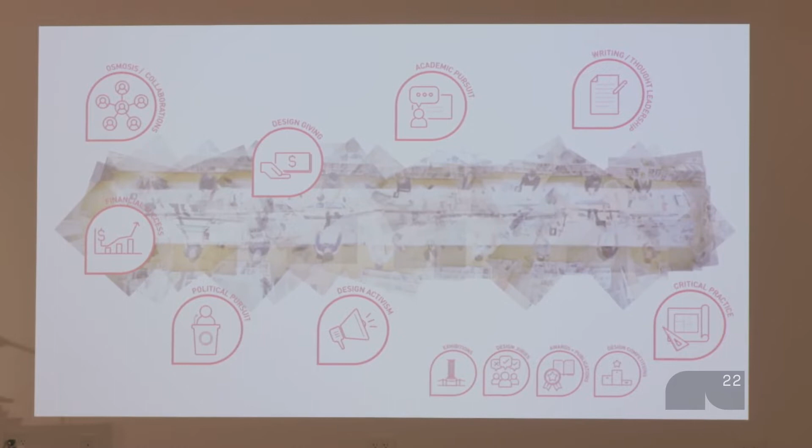So in the future, I think architecture has to become less of an image-driven art. I think architects and architecture have this task of becoming more strategic and more political, addressing the compounding inequality and social justice issues, so that we can build a better world for the 99% that we haven't really traditionally been addressing.

Architects and architecture, I think, have to do better using smart tools, advocate, create policy, get involved in politics so that the capacity of all people, communities, institutions, businesses, and systems within the community can survive, adapt, and thrive. So re-examining and rewriting the regulatory and fiscal policies should certainly go towards increasing affordability and equity for all.

That kind of is foundational to how we think. From the conception of the firm, we've been focusing on the missing middle, or mid-rise housing, trying to really be part of the lives of ordinary people going about their everyday lives. And we didn't choose it - it sort of came to us. Before we could shape it, it shaped us, so to speak.

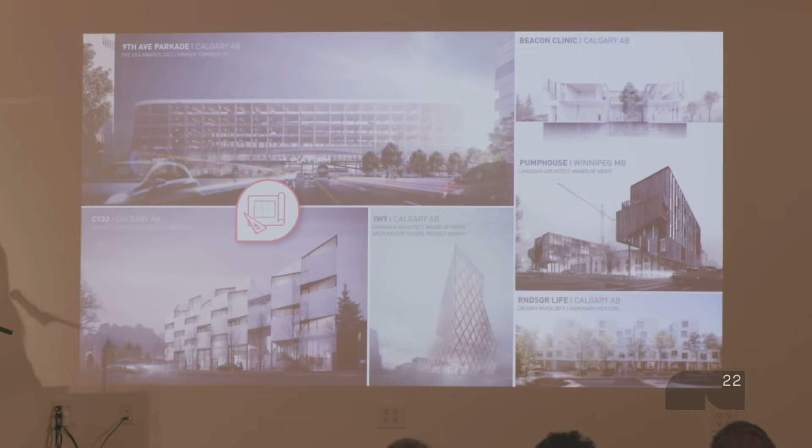There's been several efforts in that housing arena. When we started, we were very local - for the first 10 years, probably, we only practiced in Winnipeg. Then just recently, we've been expanding across the country from Calgary, Edmonton, Victoria, Saskatoon, Regina. You may not know where those are, but basically coast to coast.

Canada exists sort of 100 miles from the southern border, where 90%, even 95% of our population is. And then there's the far north, which of course is important, but is less architecturally shaped at this point.

And somehow, I guess, at the beginning of our firm, we were searching for that kind of conversation that was lacking, or the recognition that was lacking, that design actually does have a huge impact on what we're doing.

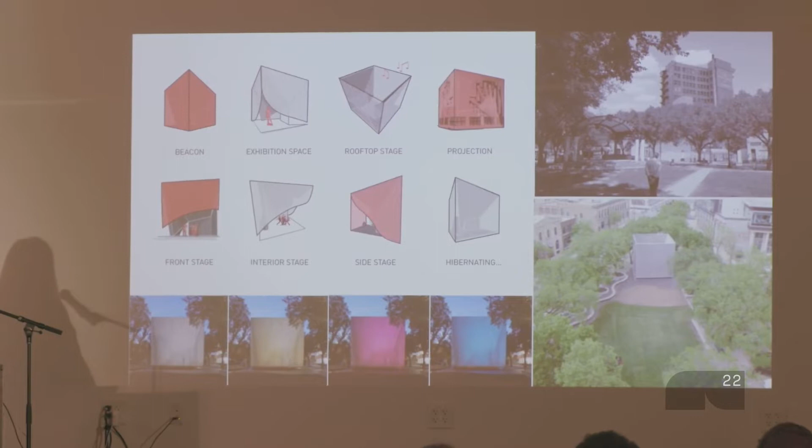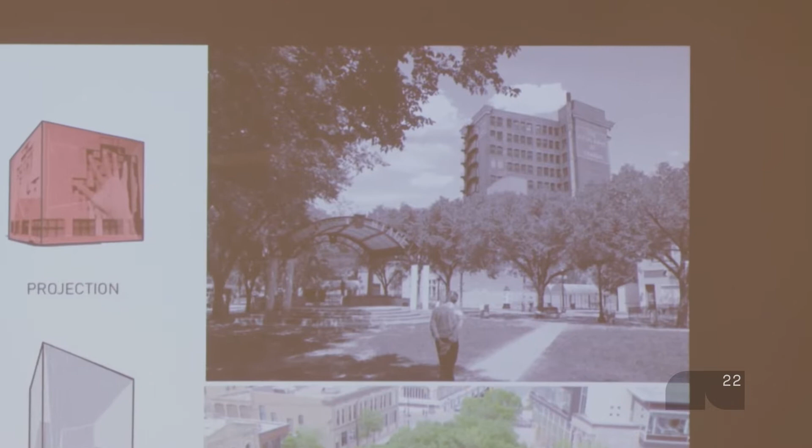From the 70s, we had to come up with a proposal for its kind of revitalization. The big idea for us was that it was empty for 321 days of the year. There were only about 44 events throughout the year, and when there's no event, it felt really sad and kind of empty and quiet. We were hoping to build something architecturally that would feel complete when there was no event.

So the idea of this shape, the primary shape of the cube, came from there, and then it immediately got traction and won the competition. The rest of the time we were really just working on how we would make it possible.

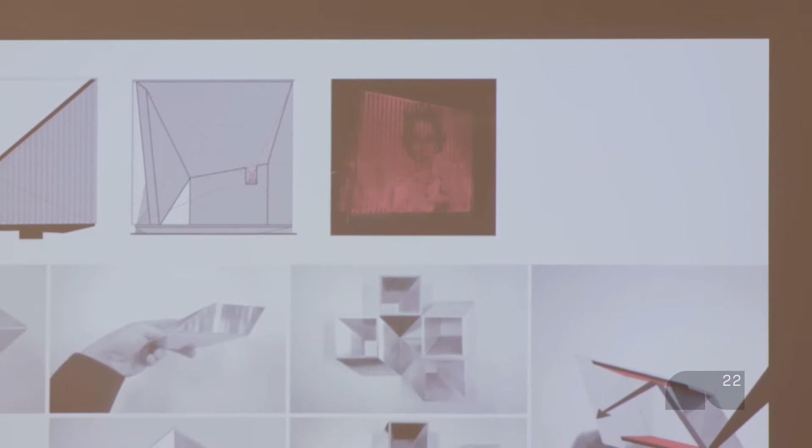The first ideas were about opening some slabs in it and opening it into a stage, then closing it up. But through vandalism and different things we had to consider, it sort of imploded instead. It's made out of 20,000 little aluminum pieces shaped like slices of salami, I guess, from an extruded piece of aluminum tube, woven together through stainless steel cable.

What was really interesting is that we discovered halfway through our process that if you project with a projector through Venetian blinds, essentially the picture gets transferred to the other side. I mean, who knew? I didn't know. So the funny thing is that you can actually put a projector inside of it and get a perfect image - a sort of poor man's version of an LED screen back in 2010.

Pre-pandemic, it now has 4 times the events, so almost 200 days of the year that it's actually busy. When it's hibernating, it still has music and can be programmed by artists with light and so on. So from that perspective, a really successful project and a popular place to take wedding photographs for some reason. The Winnipeg Jazz Festival has their event here every year, and the Fringe, our theater show, just ended this year.

But that's not the point. The point I'm showing you this project is the fact that it absolutely made people hate this thing. It was called the Cheese Grater. We got hate mail for it. There was a Facebook page that was set up just to tear down the cube.

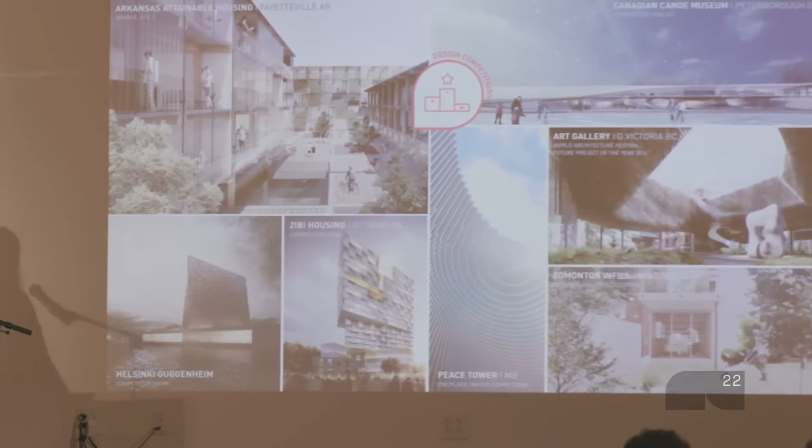So back to the ecosystem then. This is the competition - trying to measure yourself against things, housing competitions, different competitions. We usually don't have a lot of success, sometimes we do, but we try to do that every year. We set a budget aside so that we can do them, because we do think there should be a better competition culture in our city to also promote quality in architecture.

Publications and things like that - we've actually gotten clients this way. We had an article about a stupid thing in en Route magazine, which is Air Canada's national airline flight magazine, and got a call from a big developer as a result of it. We connected with another developer through Instagram, and these things are not only self-affirming or self-congratulatory, but they do result in opportunities that we can make a bigger difference in the future.

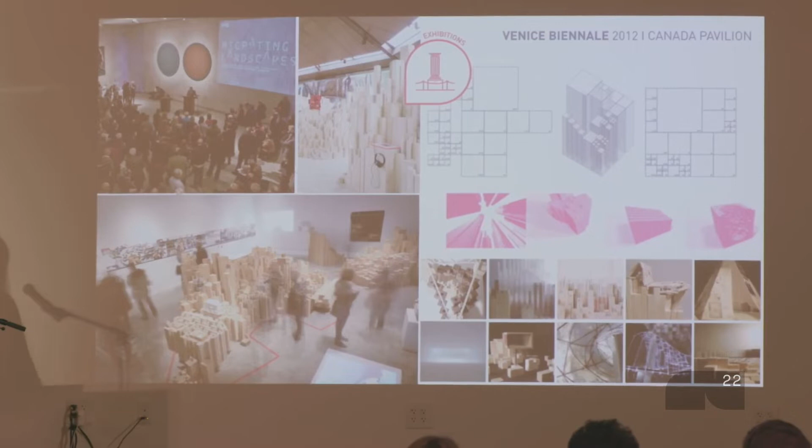Participate in juries and things like that, just to see what's out there and how we can do better. One of the major early efforts we did to try to create design culture in our city was turning Canada's representation in the 2012 Venice Biennale into a national competition.

So we got commissioned to do a project in Venice. Instead, we did 9 different events throughout Canada so that we could get better sponsorships for the event. It's not very well funded - there's a whole story to this. We were able to collect $650,000 for the project through touring it through Canada, and then created opportunity for 35 Canadian young practitioners to go to Venice to celebrate their projects there.

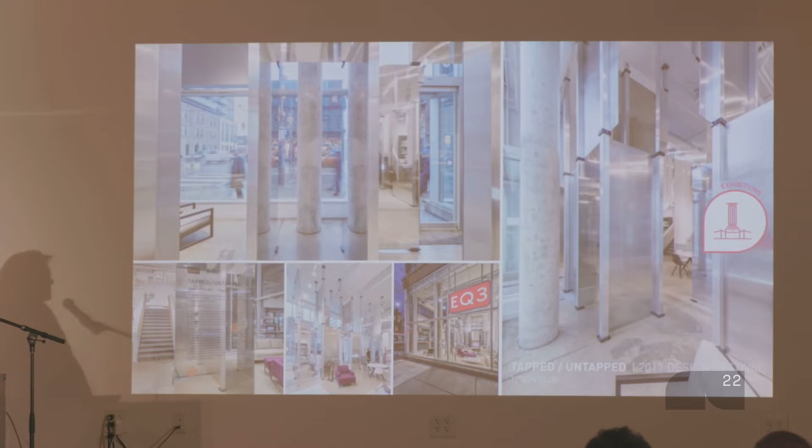There's also an exhibition as part of a design festival in Toronto, in partnership with a furniture store. We also do things like mayoral debates, or organize talks in our office called On the Board, where architects get together for a studio session with each other, withstanding critique from colleagues about doing better. The idea is raising the bar.

During our fringe festivals in architecture, on our frozen river, we helped initiate something called Warming Huts with a guy who actually runs it, named Peter Hargraves, but we were...

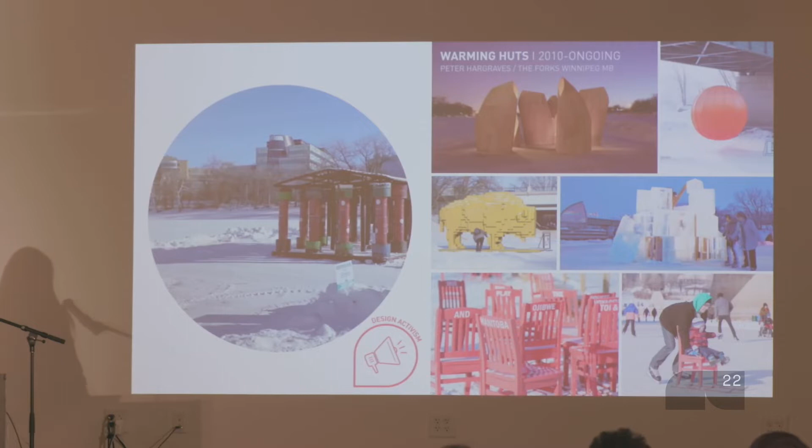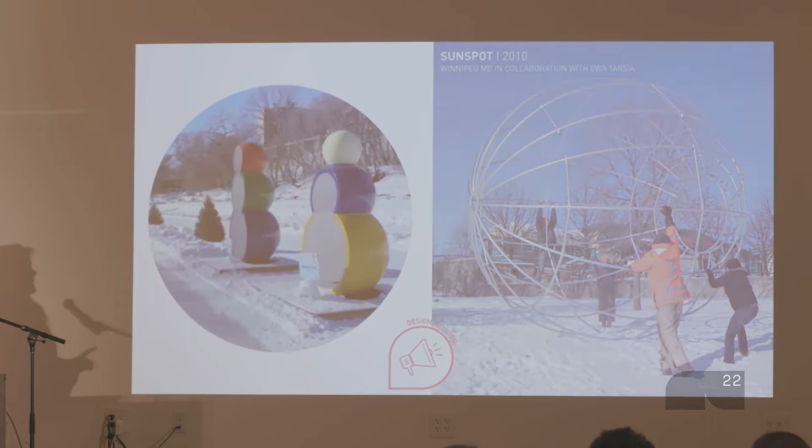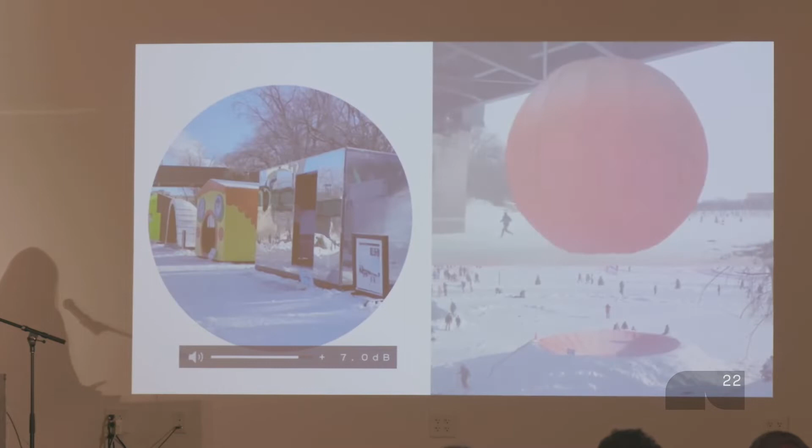Can I turn this down? Is there some way to turn the sound off? Okay, I'm sorry, I'm skating. Is there some way to turn it off? No? David, can you just dial the whole thing down? I don't have any others. We don't need the sound. What do you want to do? No, it doesn't do anything. Okay, I'll skip. I'll try to go fast. Sorry, I'm trying to get past this. So just look at the pictures. It doesn't move any faster, I apologize. Okay, I'm so embarrassed, I hope this stops soon. Last slide. Oh, sorry. Okay, I don't know what happened.

So that was Warming Huts. You can see there are little warming huts along our frozen river in the winter, January and February. It holds the Guinness World Record for the longest skating trail, about 12 kilometers, or 8 miles. You can skate on the frozen river. It's been a long time before Winnipeg really embraced its conditions, with people getting outside in minus 30, even minus 40 Fahrenheit weather. The point is you can always find a way for people to find joy in the everyday and take over those urban spaces.

Moving on, the next advocacy project: we were lucky enough to win the Prix de Rome for Canada, which gives you grant money to do a project. What we proposed was to have dinner and wine in 8 different design cities across the world, to find out how they perpetuate design culture, what builds it, who maintains it, where it comes from, what we can do, and how to bring those lessons back home.

We had a great time having dinner with key influencers in those cities through local connections, learning these lessons. It's amazing what people will tell you when they've had a little to drink and good food to eat. We wanted to play that off when we came back to Winnipeg after a year of different team members visiting different cities.

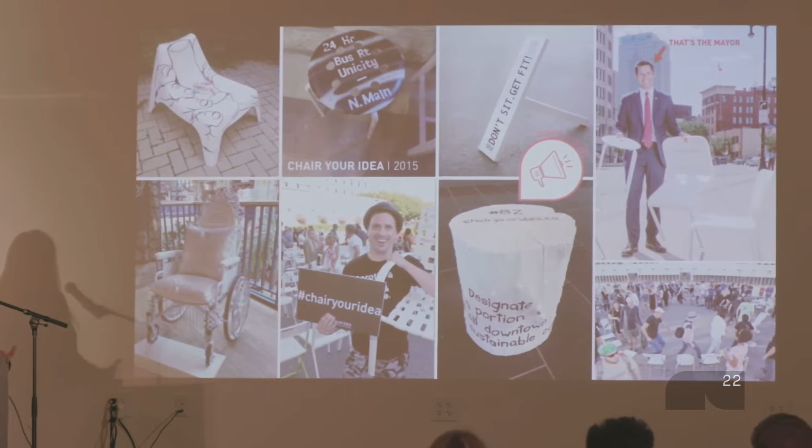This one was asking any Winnipegger, any regular folk, to have an idea, sort of an urban guerrilla idea that we could do for $30,000, and to write it in a format that would fit Twitter, which was 140 characters at the time. Then we would put a chair out in the public realm where that idea was written, so you could have a conversation with your neighbor about it, hopefully instigating the next idea.

At the end of that competition, with the funds we collected from entry fees, which was $25 each, we were able to have $30,000 to implement one idea. And the Winnipeg mayor, pictured there, got a book of 1,000 ideas that the city could consider doing in the future.

But also, this one is one of my favorites. I hope there's no sound in this... there's not, okay good. So the scale of change can also be incremental, achieved with small means.

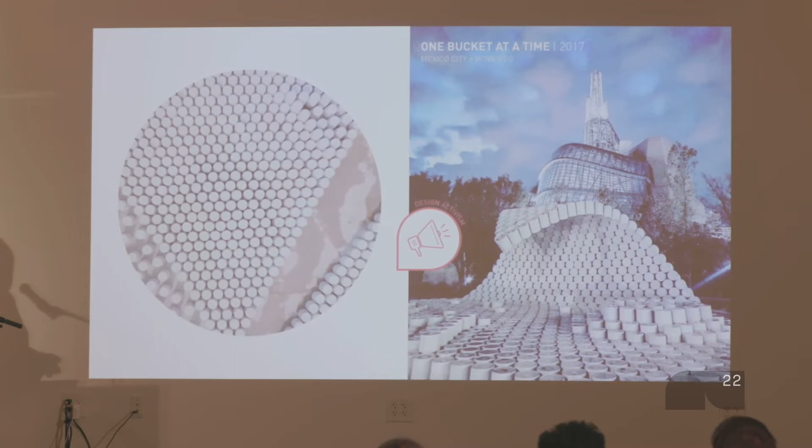This is a project called One Bucket at a Time, a collaboration with Factor Eficiencia from Mexico City, reclaiming public space back from the corrupt entrepreneurs of Mexico City called Viene Viene. The Viene Viene place ordinary painter's buckets in the public realm to create parking stalls where they don't exist, then charge money for the stall. It's sort of a corrupt operation.

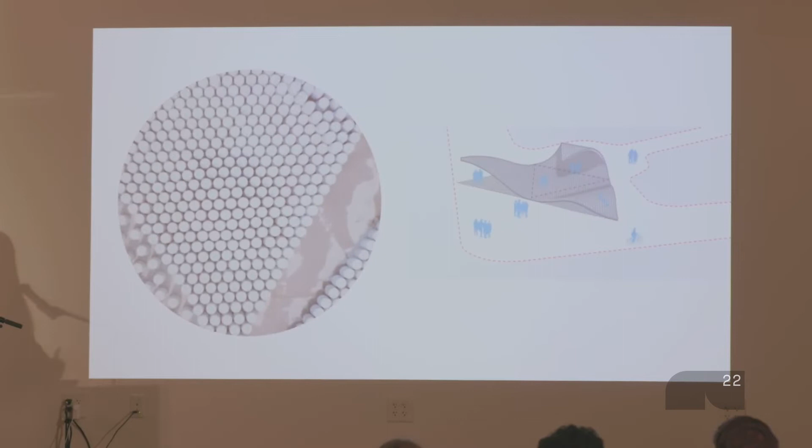The police are in on it. They get a cut.

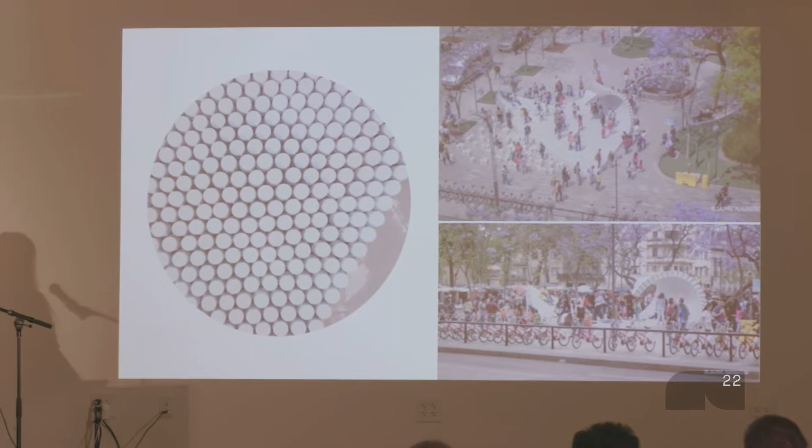Of course, it was a temporary installation. We were invited to go there to draw awareness of the issue, but it was super amazing to see this thing come to life in Mexico City. It was used really intensely for three days, playing on the idea that the painter's bucket was slightly tapered, so once you strung them together with ropes in the back, it created this cool little shape and wave you could almost surf on.

Once we released the buckets into the crowd afterward, they disappeared within a matter of hours. People would claim these buckets back into whatever use they would have in their household.

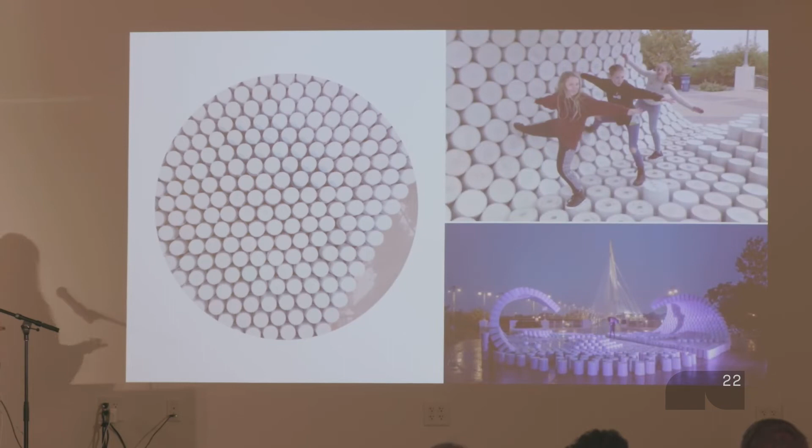But the even better part, in my mind, was that we then brought it back to Winnipeg as part of our design festival, and it got rebuilt there. We had the idea to sell the buckets for $20 each for Winnipeggers to donate for a good cause, a girl orphanage in Mexico City. So they kind of got sent back in our minds, full of hope. We collected about $10,000 for the orphanage you see here.

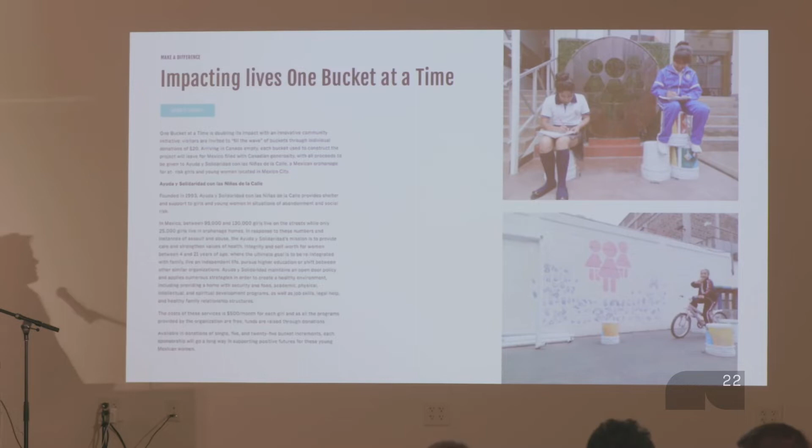So I guess in a way, it was proof that you could actually make a tangible difference to somebody's life who really needed it. Slightly more frivolous project in that sense.

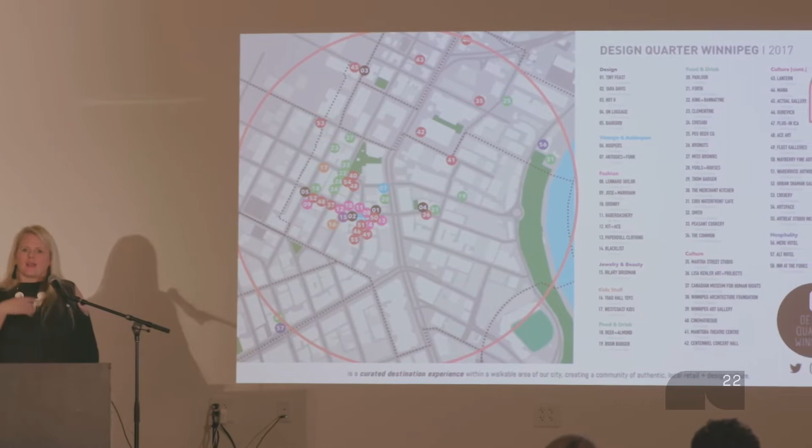Design Quarter Winnipeg is something I encountered as design quarters or design districts back in my hometown of Helsinki—basically mapping out where the creative businesses are, what they're doing, what's already out there, and whether they're within walkable distance. When I go back and I'm a tourist in my own hometown, I pick up one of these maps and actually go to different stores to see what people are making and how they're making it.

I started mapping out what Winnipeg already had, and about 60 different businesses I thought qualified, then put together a business plan for it, collected the startup funding, and then we hired an executive director. It's been running since 2017.

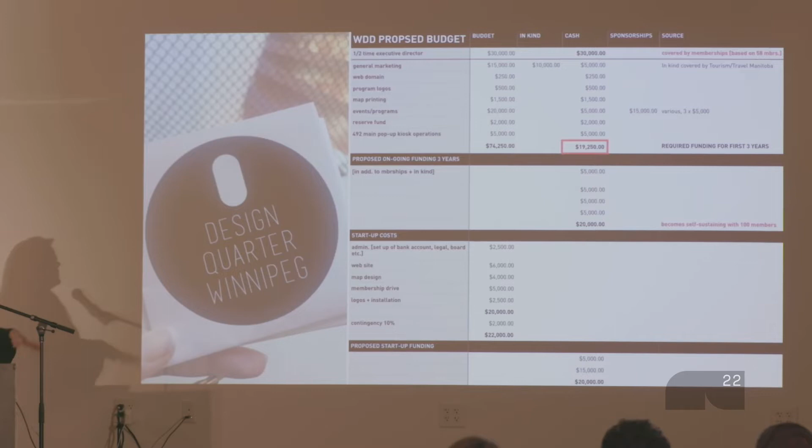Obviously the pandemic was not kind, so we'll see what the future of it is, but it was sort of successful. The idea is collective marketing—the power of that collective to help those businesses bring Winnipeggers to the core area, to discover those businesses, and to entice appreciation and walkability within the core area of the city.

And in terms of the political realm, I've been in the MAA, the Manitoba Association of Architects, and started something.

The other such effort has been being chair of the Winnipeg Chamber of Commerce and starting something there. Usually I'd be an MC of an event - there's an event every month that gets the business leaders of the community together for a luncheon, and you announce people and do that sort of thing. So I convinced them that I should do a 3-minute segment, which was actually always at least 6 minutes, a short section on urban design issues, so I could talk to the business people about why this makes business sense, why it makes sense to care about design.

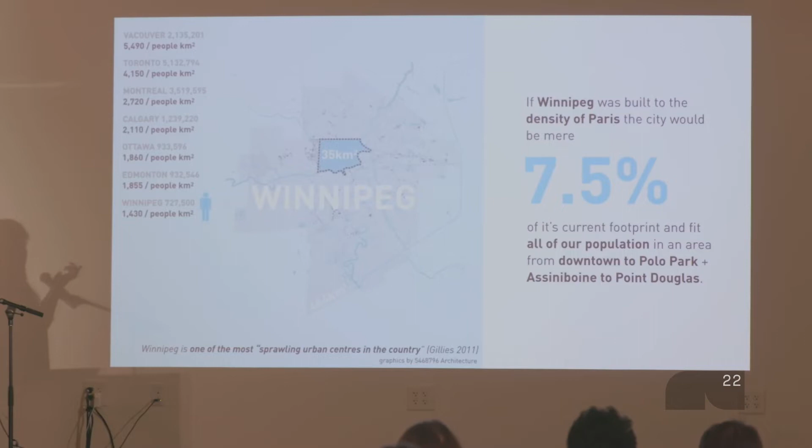Winnipeg is one of the least dense cities in our country - 1,430 people per square kilometer. I looked up Raleigh's number, it's even less, something like 1,200. So you've got some work to do on that front. But if you look at the footprint of Winnipeg here, and if you were to be at the density of Paris - which doesn't have any tall buildings, we're not talking Tokyo or New York - it would fit in 35 square kilometers, a fraction of the size, about 7.5% of its footprint.

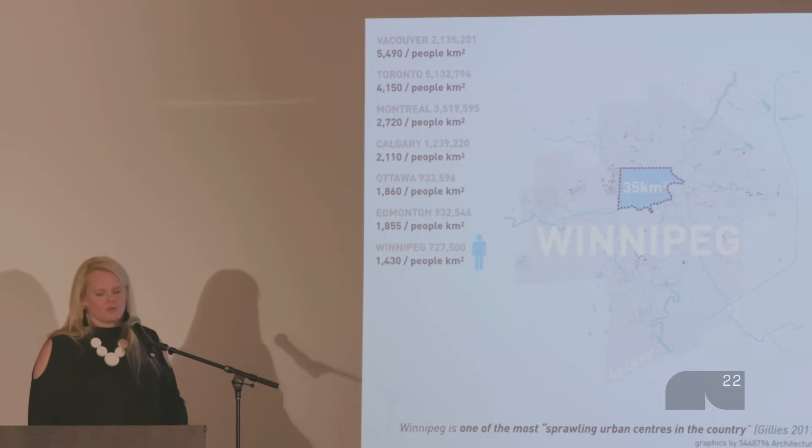And you can understand why we don't have resources to do good public transit, why we can't invest in better services, better libraries, and things like that which create community. So I was trying to prove that point. In fact, I looked at Winnipeg's city budget, and over 70% of it goes to things that have directly to do with distance - the length of sewer pipe and roads and maintaining them and so on. So it's really hard not to do something to build in as opposed to out, which further perpetuates the problem that we have.

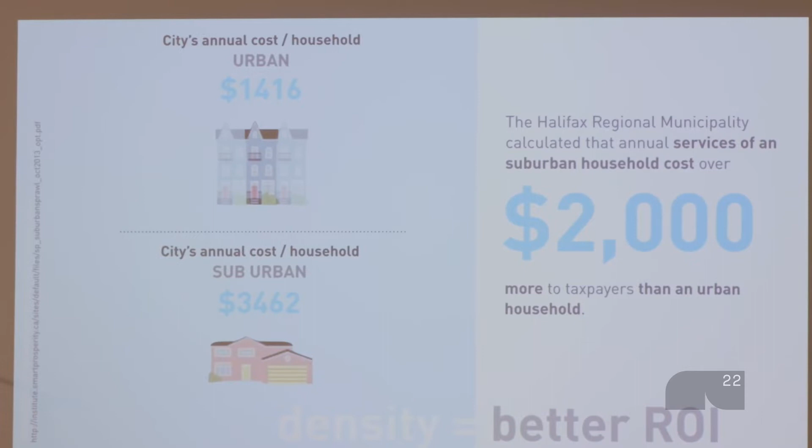There's a study from Halifax - far east in Canada - that found the cost of servicing, just purely servicing once it's built, from a city budget, is about $2,000 difference between a suburban and an urban home. If I take the same metric, what that meant for Winnipeg is that we would save over $4 billion in 25 years by putting our new construction within the existing city footprint as opposed to allocating new greenfield for development. And this is just for the next 25 years, to accommodate about 80,000 new residences to house about 200,000 people.

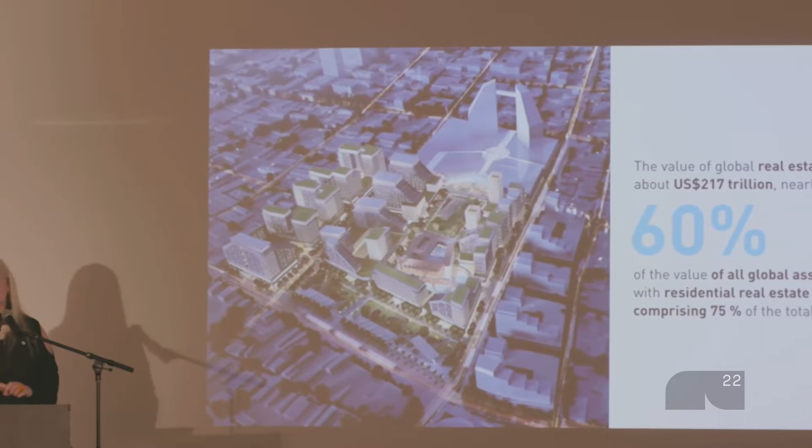And I think one of the big issues with housing, and why affordability is such an issue that's hard to overcome and hard for the architectural profession to tackle, is the financialization of housing - real estate investment using housing as a financial instrument. So we have investors, offshore investments in Vancouver in particular, that keep housing vacant, keep it off the market for ordinary people and so on. So something has to shift, even in Canada where we're socialist.

To really highlight the other issue: the average North American occupies about 4 times the square footage per person, personal space in our houses and homes, than the average Asian, or twice as much as the average European. So when we think about the environmental crisis on our hands, something has to shift there.

The other factor I talked to some students about earlier is how we solve the affordable housing crisis in this country. We have to recognize that compared to Northern Europe, where I'm from, approximately 35% in good cases of the overall housing stock is public or supported housing with public funding. So every unit built in America, or any country for that matter, in Europe about 35% of that is public or supported housing. That's how you make things affordable, that's how you create equity.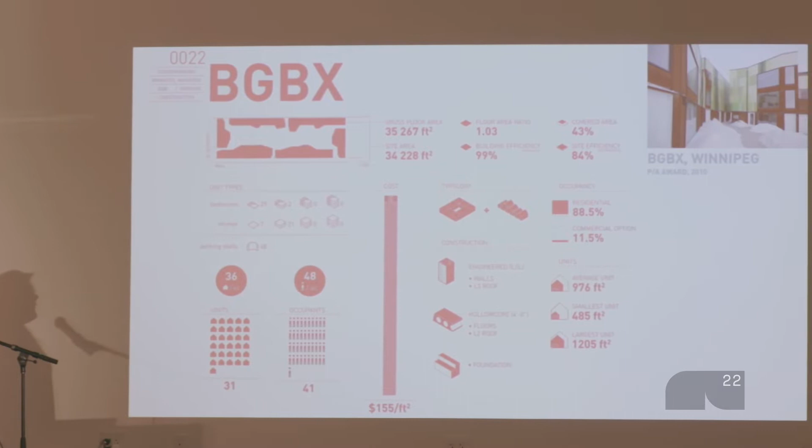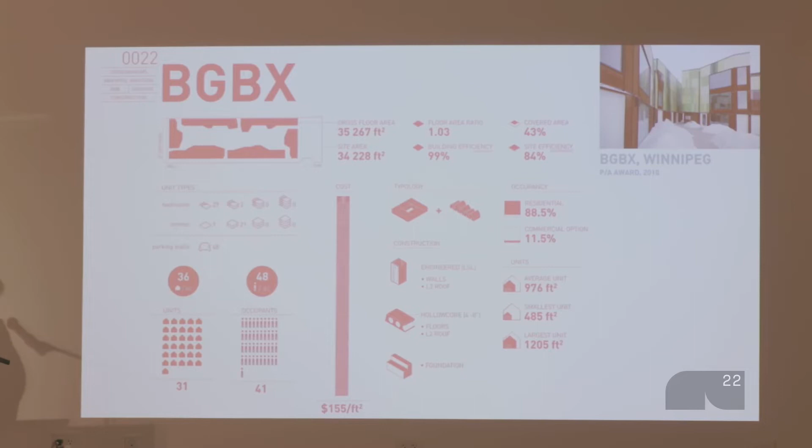And then from the beginning, I think what's helped our practice try to do good work, or work that's considered critical, is that we're always thinking in terms of numbers. We were educated by a bunch of developers. We have to understand that there's no project unless we can make the numbers work. And then where we can carve architecture out is the remainder. So as long as they make a profit, we have a case to be made. That's something that's ingrained in us, and we're always pushing the numbers forward in all of the things.

So how do you ask families to live here? Well, you don't. They don't have a place to go that they can claim as their own. It's even in the language - the way I would say I'm from, not a building, but a yard. We would use this word 'piha', and I'd say I'm from that piha, which places a different value on what's important. It wasn't the buildings, it was the space in between.

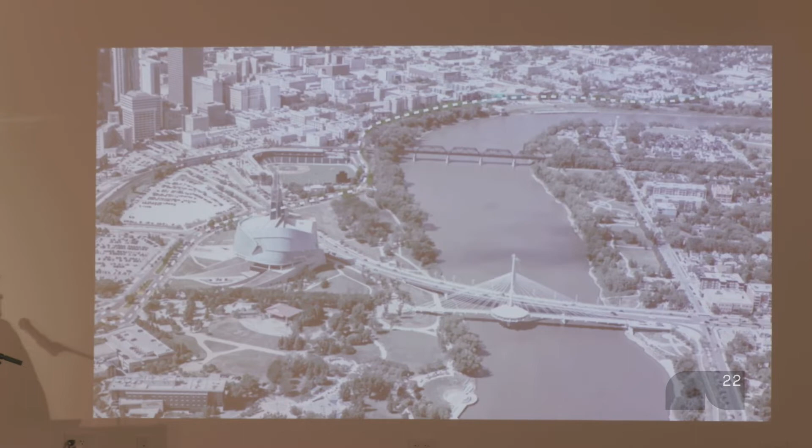Going into a couple of projects, this is Winnipeg, one of the major rivers. There's the Red River, it runs north into the Hudson Bay, coming from North Dakota, I guess. And there's our new Human Rights Museum that was built a few years back by Antoine Predock, who won the competition.

And this is Waterfront Drive, the line that you see. Weirdly enough, we've been able to build several projects along this path, sort of like Winnipeg turning itself back onto its main resources, the natural resources, the river. Instead of being industrial lands, the frontier is turned into public amenity and so on. The first project is called UCube.

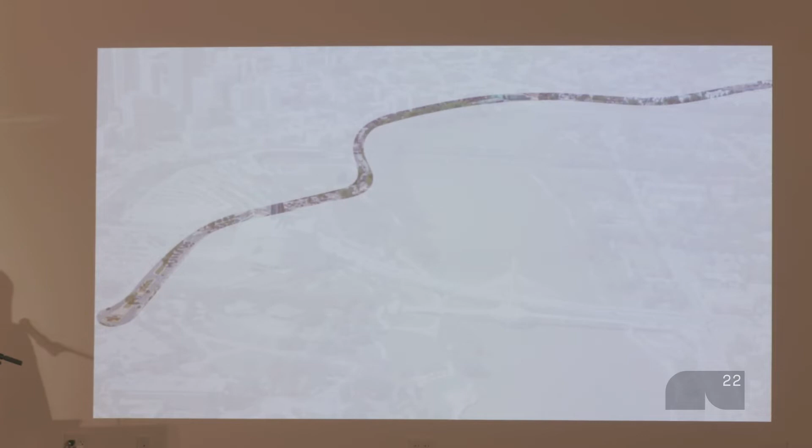It's just a small little project. Some of the stats here: 18 units. We got a young developer that wanted to put a project together, and the story is that he came from the house building trade. I think he was 28 at the time. He knew residential contractors, and they're considerably cheaper than commercial ones. So there was a sort of a trick for us to figure out what building form we could create that allows him to tap into that more affordable construction trade group.

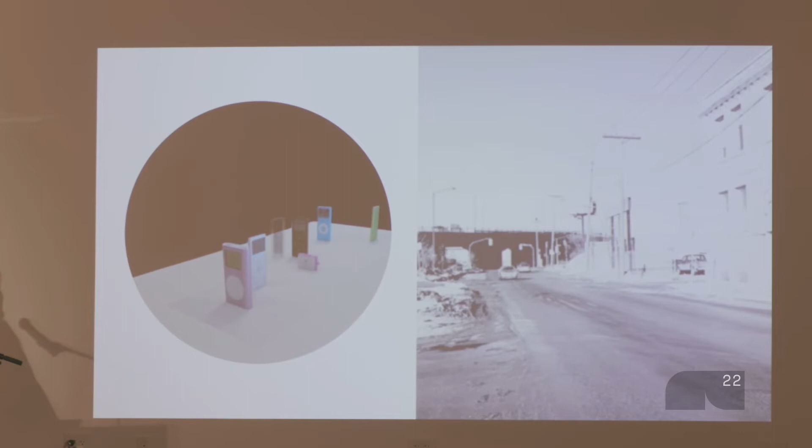And so it turned into, and it's industrial, so this will date me badly. Kids, when iPods were a thing, back in the early 2000s, we were in studio, teaching, young in our careers. And then somehow the idea came that you could have your own identity, but it's contained in the same thing.

So, industrial fringe area, transitioning from that industrial past into more of a residential neighborhood. This was the project scheme. We went from a building block where you have to build a corridor and space that you have to heat, into sort of a 100% efficient project.

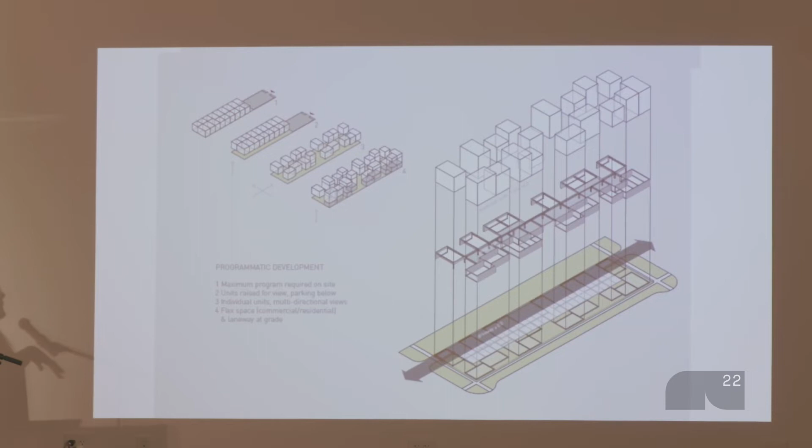Again, money-wise, that makes a lot of sense. Everybody has their own front door at an upper deck and so forth. So 18 individual units, 3 to 4 stories. There were some tricks in there.

We had to have a 1-to-1 parking ratio still, so we lifted the thing up, six feet off the ground, which also provided some security from the neighborhood that was still transitioning, and created this place where people could connect.

Inside the units, the blocks would either start on the ground floor with access to the street, or start on the upper deck above the driveway and go up from there. At the top, there are rooftops where community members could also talk to one another across the parapet.

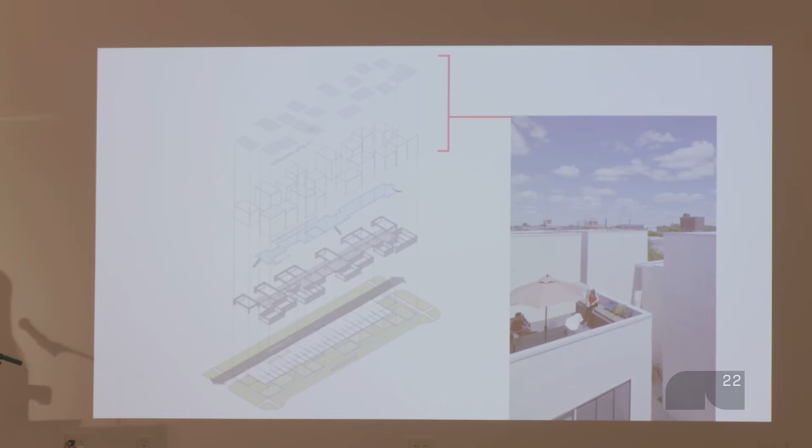And then inside, a rather naive idea, but we wanted to somehow rethink housing, right? This wrap went into the building, and the units were vertically organized. Sometimes half the units were flipped so that your living room was at the top, giving you the best view of the city beyond the immediate surroundings, which were still a bit sketchy.

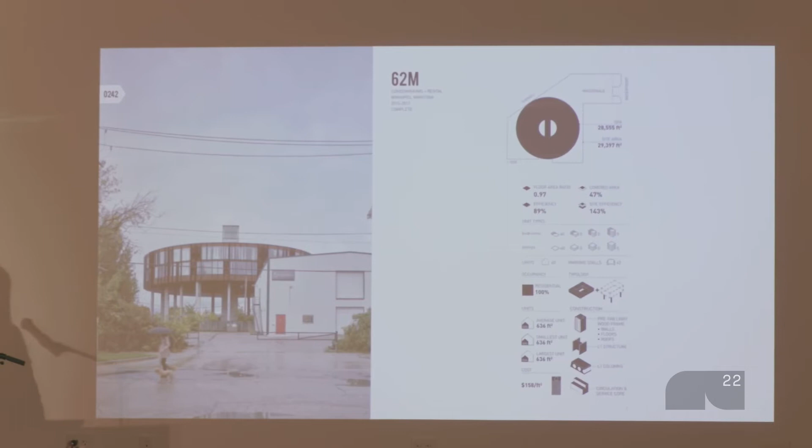Then pretty soon after, it took some years to get going, but the same developer with other partners came to us and asked if he could make housing work on this industrial site. It's behind industrial sheds, there's a freeway nearby, so there's no direct views, no access to the street at all, just a little sliver, but the building wasn't visible. Could we somehow make housing work here?

It was sort of a super hyper-rational project where the approach to the building had to be that it needs to be lifted up, because that's the only way you could actually convince anybody to live there.

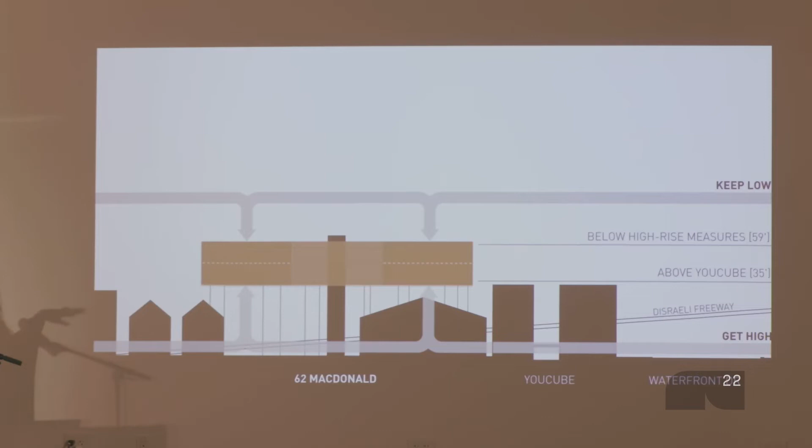And so of course this cost money, talking about money again, but we had to work the rest of the project to try to save the money we would have spent by building this pancake up in the air by 35 feet.

But what happened is that, hyper-rational in the sense that typically you would do housing in an orthogonal format, all your building materials are flat materials. There's no curved glass unless you're SANAA from Japan and you can afford it.

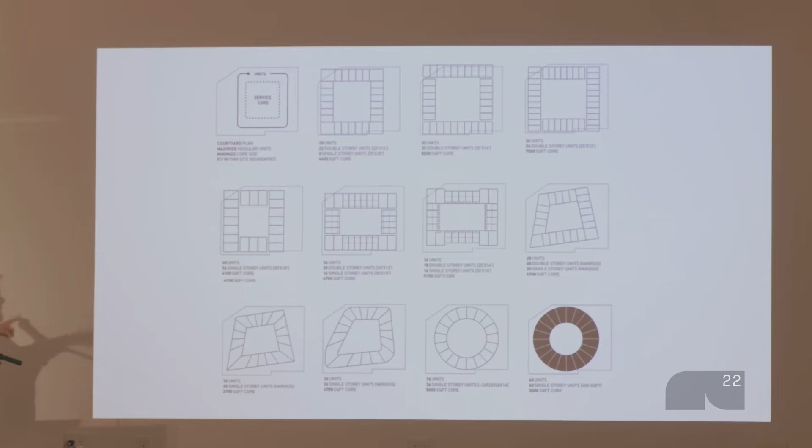But weirdly enough, as you do this, you discover that the donut shape is actually 30% more efficient in terms of being able to get the same amount of units, enough perimeter for access to light and views, but then also your corridor space and the dark space in the building is reduced. So it's the most efficient form that way.

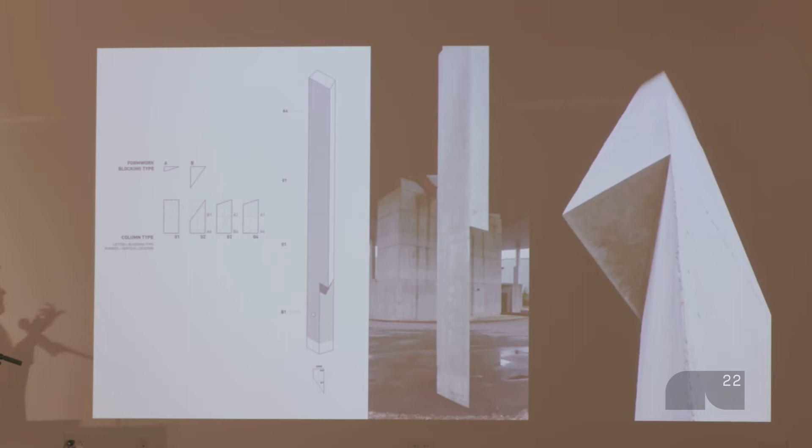It was a bit of a hybrid of construction. We have concrete columns at the base, steel frame that creates the pancake, and above that is wood construction. It's only a 3-story building as far as the building code goes, so we had a lot of savings when it comes to some of the building code requirements that cost more. The columns, just a small detail, were shaped to the radial pattern, so there's all kinds of architectural tricks in there.

Again, in the 1950s, we occupied about 290 square feet of space, each one of us. Now that number is over 900 square feet. So part of this was trying to convince Winnipeggers and North Americans in general that if you design well, then maybe you can get away with less.

Each unit is 636 square feet. It's got amazing views, as I was saying, so they're all pie-shaped — pie in the sky.

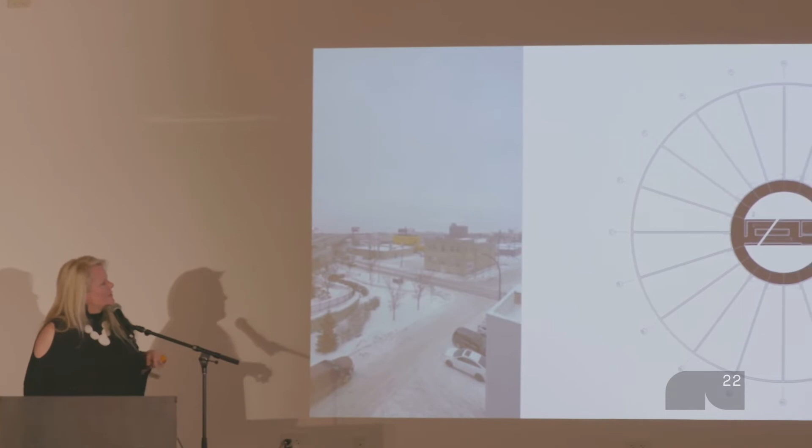2 levels of them, and there were 2 types of units, more traditional. But the benefit of it was that you have this utility at the back, and then it splays out so you can fit the living and bedroom space at the front.

I actually lived in one of these units myself, and here's a view of that. This was when I was temporarily a bachelor? Is it a female version of that? Anyway, so it was sort of an upgrade version.

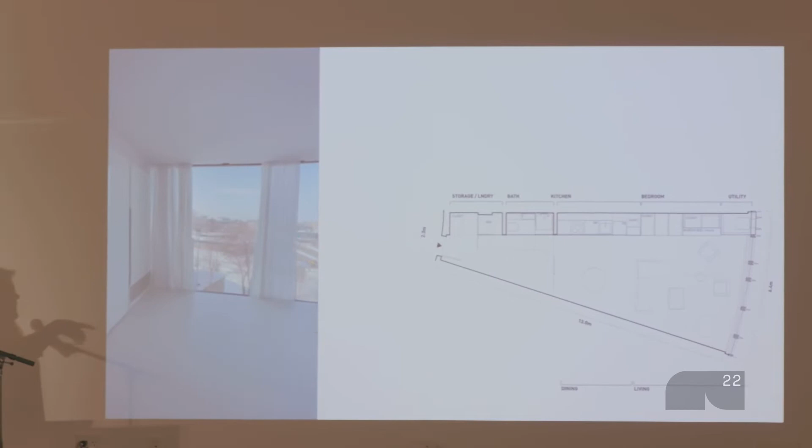I had all the utility in one bar along the side of it, and then it could open. I had this fabulous bathtub in the middle of it, which other people find weird, but you could also fill it with ice and have a party — I thought it was a brilliant idea.

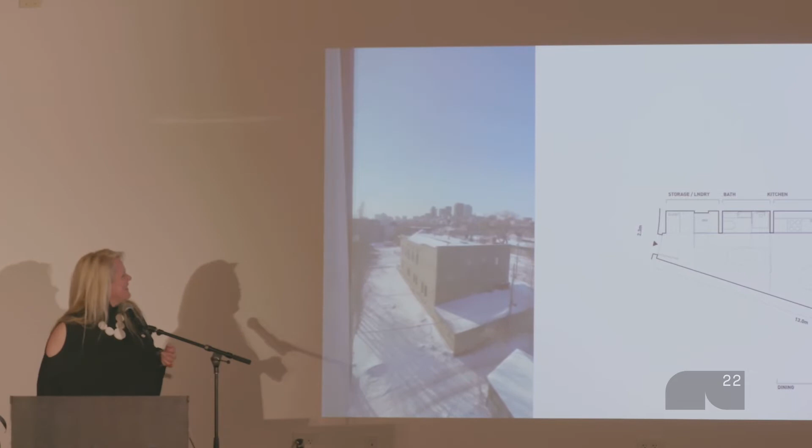There's the bathtub, and then you could open the kitchen wall and close it up, so if you wanted privacy, you could certainly have it. The rest of the bathroom is behind the wall — the typical toilet, shower, and so on. These were different ways to kind of work with that slice.

There it is in action. Again, as architects, we're always trying to figure out ways that we can bring life to the mundane facade that is generated by housing. You usually have to line things up, the windows are always lined up, and there's nothing new to invent in terms of facade. We're trying to figure out ways to make sense of the plumbing and infrastructure without losing money, making those connections simple, but still having variety on the facade.

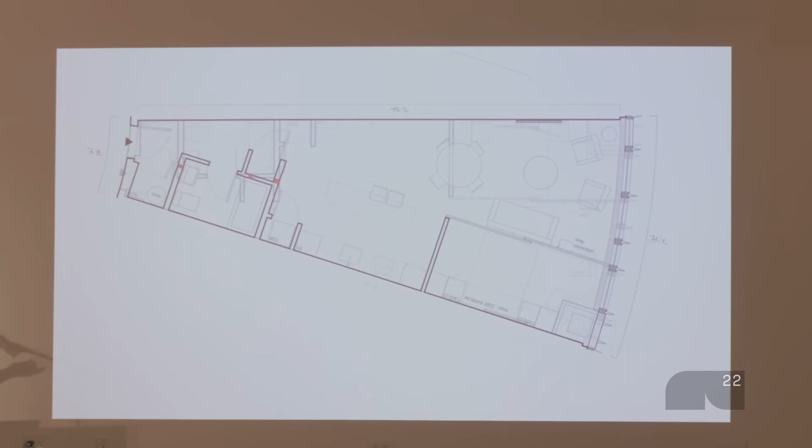In this case, we're working with flat materials, so we have faceting on the face of it. The windows are flat, but they're in smaller increments, and we're trying to work with these fins that go vertically to mask the faceting of the facade. Because of that unit flip, we can also flip the window pattern, and these were some of the studies done on that.

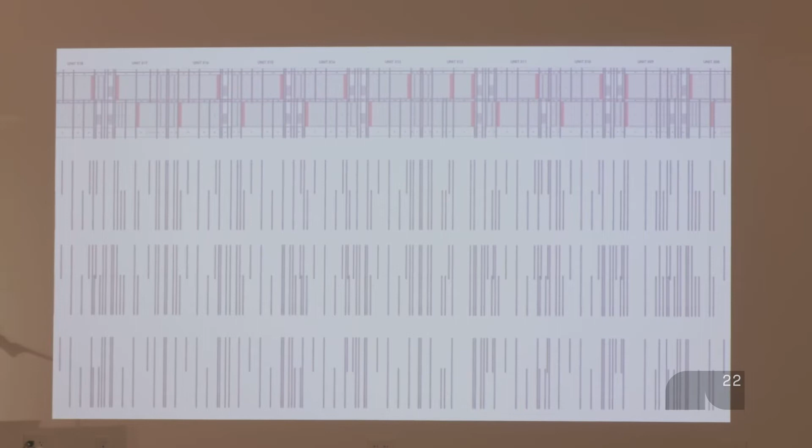We also had a mechanical unit, a magic pack I think they call them — any architect out there might know what that is — that had to be hidden within the facade so it also becomes absorbed in it. Here's the final result, where the faceting disappears a little bit and there's a deeper shadow line as a result of it. So this is looking up in the frame.

It's an outside corridor, which gets some criticism—people ask why on earth you'd do this in Winnipeg in particular. But the thing is, we don't treat houses any differently, so why would we worry about building an indoor corridor? As it turns out, it was a brilliant move during the pandemic because people weren't worried about being in the same indoor air with others, and it's also a place where residents tend to gather and talk to one another.

It's much more feasible in the summer months, of course, but you can see how that works, and this is way cheaper. We have a chain link fence here as a guard. You don't have to maintain or heat that space throughout the winter, which provides long-term costs that are much more feasible.

Some architectural pictures there—my bike was often tied into the fence, as you can see, and we sort of like these contrast pictures with extreme snow peeking past the units that you saw on the previous project.

Then what happened, as many times happens, is our developer ended up owing us a bunch of money, and we negotiated with him that he should sell us the air rights to the rooftop of the core.

You can see it there. It's another way, aside from having to make up some of the costs we spent on it, to try and entice this design culture and invite people into the city, having them experience it differently—even though it's in a rough, industrial part of town.

That's another kind of design-giving effort we have. We also instigated this little project, a bunch of containers along a building that we actually ended up being able to acquire at some point. This is city property—they had some really ugly sheds on the site.

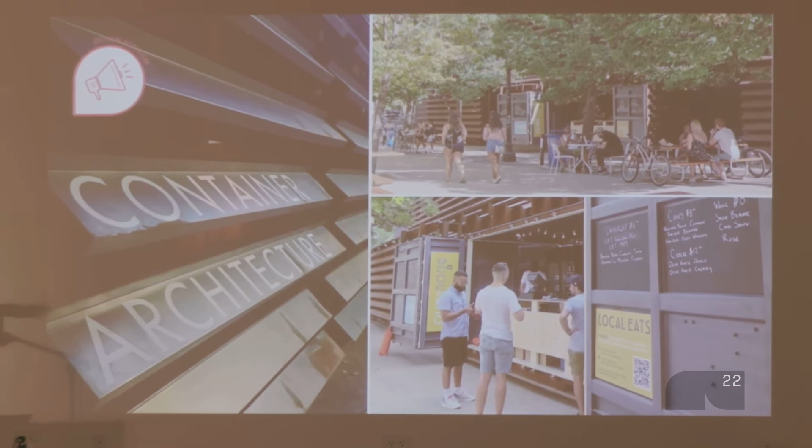There are cultural events that happen here—this is where that cube was when I showed you the first time. Now it's turned into this; we actually paid for one container, and the other two are storage containers for the city's lawnmowers and other cleaning equipment.

Now it's a local bar, with a bunch of businesses from the area. You can actually order food to this common eating park space.

We also try to write about these things and propose business ideas about how you densify Winnipeg. That was part of Innovative Solutions for Creating Sustainable Cities by the former Dean of Economics at the University of Winnipeg, and there's another book there as well.

We also try to give back to design events and things like that. My connection to Raleigh really happened when I was at a conference speaking a few years back, and there was a woman there, an urban planner, who told us about this great thing Raleigh had done, called Walk Raleigh—a guerrilla initiative back in 2012, I think it was.

Anyway, I was so inspired. I sat there and thought, oh, I have to go back and do that for us. Sometimes good ideas are worth copying—you don't have to invent them all. And they welcomed that, from what I understood and what we researched.

So our office went out one evening, organized with these signs, and tried to provide signage on how long it takes to walk from one place to another.

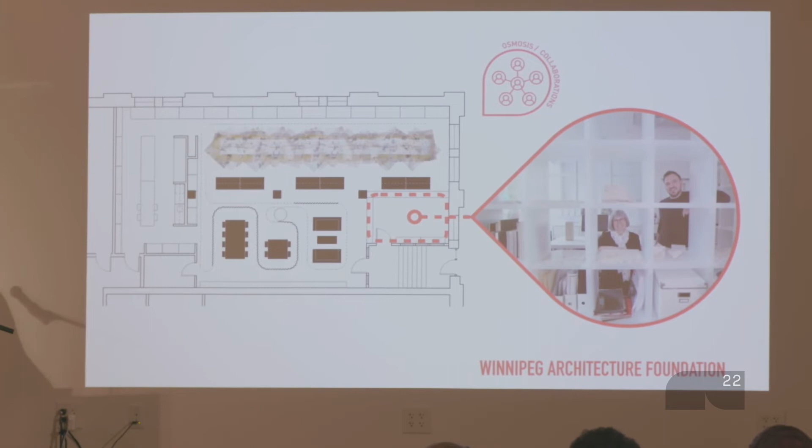Again, very much like in situ, we have a table we've always had, where we all sit around together. We talk to one another, so the junior person gets to hear what a senior person is doing on the phone and on their project, which is good. We also have collaborations - the Winnipeg Architecture Foundation occupies the space in front of our office, more of a storefront. They organize tours and events. The Design District Winnipeg was housed here for some time, and so was Storefront Manitoba temporarily when they lost their ED. One of our developers, who is Calgary-based, has their place in the office as well. Somehow those kinds of osmosis collaboration things really help.

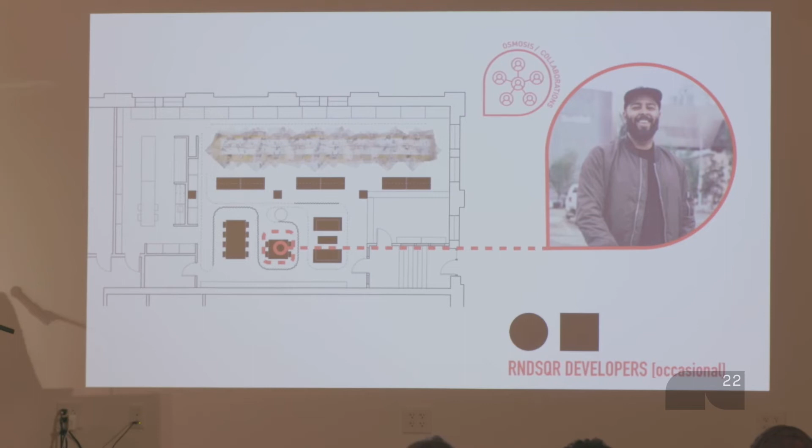Should I try to stop, or what are we doing for time? Another 10? You're okay? All right, well then I'm going to present two more projects.

This is one of them, and I'll skip the rest. This is called Pump House. It's one of my favorite projects we've done, because it represents so many things. You can see some of the stats here - we'll come back to that later.

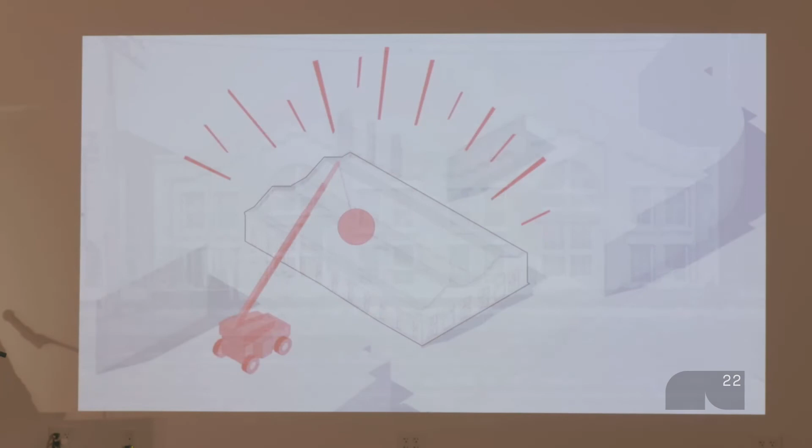The picture is terribly pixelated, but this is the historic fire protection building that Winnipeg built after the big Chicago fire, around the turn of the century, to protect the city from a mass fire. It draws water from the river to fire suppress a fire. It's been sitting empty forever, with 17 different attempts to revitalize it, but it was a money pit because you'd have to preserve the pumps inside. They were made by the same maker as Titanic engines, so they're historically important. But there was not enough foundation to build here, so it was kind of slated for demolition after all of this.

What made a difference for us is, first, we found the developer, did the pro forma, and connected the developer with our CentreVenture Development Corporation for the municipal government so they could get funding. We also discovered a crane inside that had been used to move the pumps around for servicing, and we talked to structural engineers - that crane already had the capacity that you could actually use, as opposed to building new foundations to support new floors.

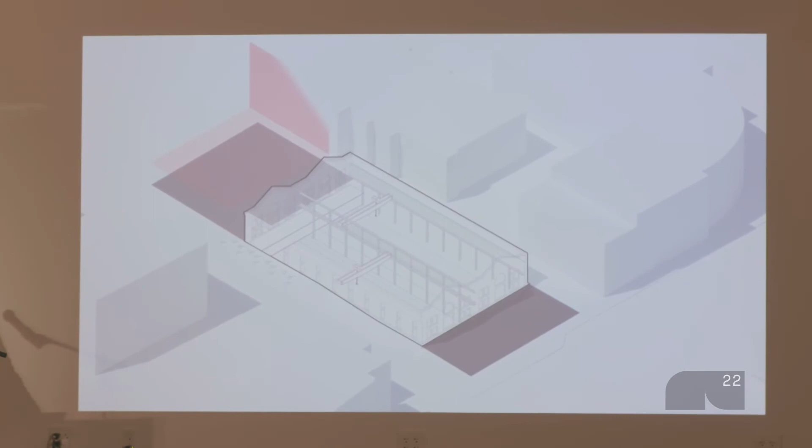So all of a sudden, the pump house itself became feasible floor area you could actually occupy. The second piece of new information was that people had looked at developing the site in the back, but not the one in the front. This 40 feet, facing the waterfront drive I showed earlier, was also deemed too small to be feasible for development. But we figured we could make housing work on that. So together with all those pieces - the housing in the back, the floor we could sling into that gantry crane elevation above the pumps, and the front piece - it would give you enough project to make it worthwhile.

And so it became these three similar slabs. One is single loaded, facing the river in the front, and then two are kind of double loaded with exterior corridor - again, our way to save money in the back.

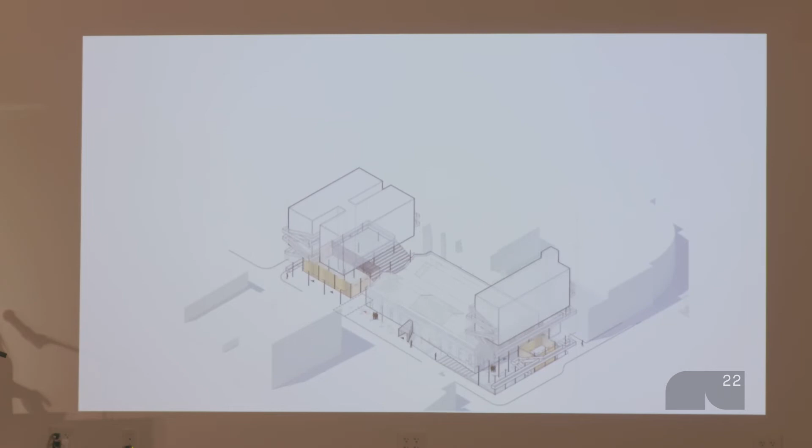And then about 15,000 square feet of that interior is commercial space. There's also a restaurant off of this plaza now—you won't see it in the pictures since it just opened this summer and I didn't get around to taking pictures yet. But there's this great intermingling.

So these are hard projects because on one hand you're trying to adapt historic buildings, you're trying to add residential density, you're trying to intermingle it, you're trying to make sure everything's happening. So there's no clear parti.

Here's the new floor, so there's openings in there, and then we have 93 residential suites within those two blocks. Hopefully we get to the point here quickly where you can see the beauty of that space.

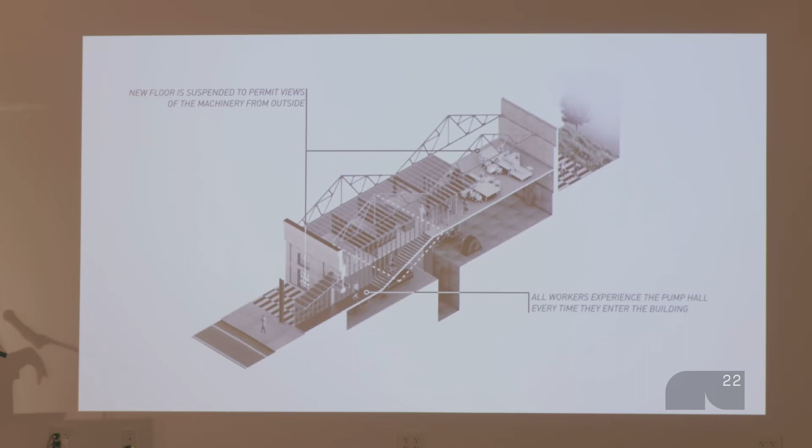So new floors suspended, then we opened some skylights into it—workers experience the pump hall as they come into work. It was an ad agency that we also found as a tenant. Here's the original picture of it, and I think we're going to move again, but there's hopefully no sound.

We used super simple steel studs, just lightweight steel studs, painted them black, trying to feed off of this original rough and ready industrial feel of it, and so it was super cheap.

Then we put glass up, essentially, so the pumps are always present in the space, and yet it's using pretty simple, straightforward materials. The skylights above make the workspace reasonable so that even though it's a deep plate, you're not searching for the light only on the perimeter.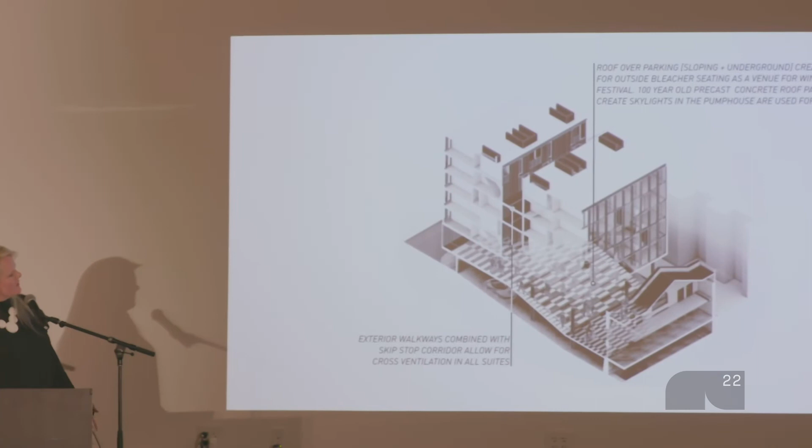So I guess we're just going to go back to this, and then the residential portion. Oh, one more thing—there's a bleacher area. There's 24 stalls of underground parking below the bigger building block in the back, so it's got a bit of everything, but still a pretty good ratio: 24 stalls to 93 units.

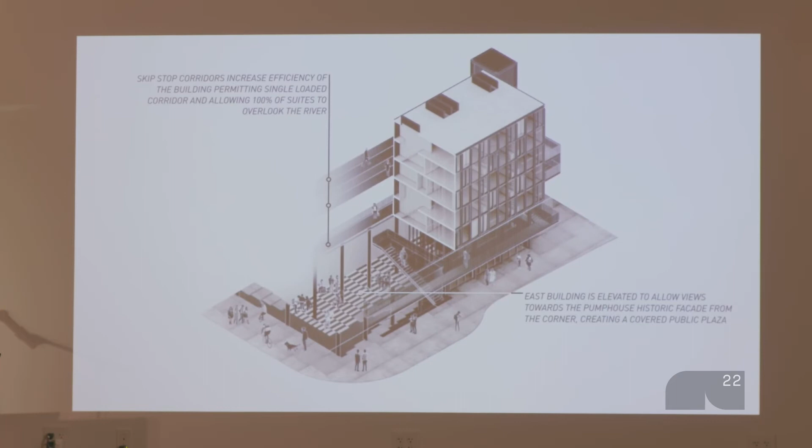And then this one, because of the historic nature of that facade, we had to lift up two levels essentially to expose some of the facade, and then cut in so that you could get under and in between the pumps at the lower level to the bottom of it. So there's a public plaza as well in there.

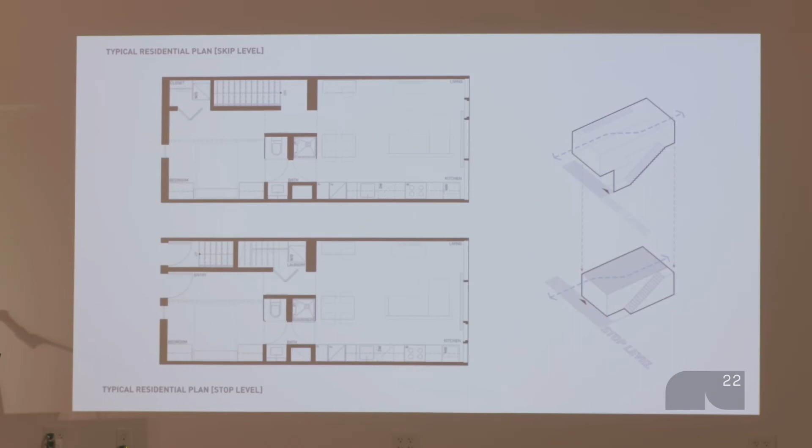The suites are super simple—either single level or skip-stop corridor types, meaning you save in efficiency since you don't have to have a corridor at every level. We have accessible units on every second floor, elevator takes you up, or you can take a stair up to the upper level, and then you don't have to have the corridor repeated. So there's the first building, and I've got a bit of the meandering route here.

So this was in the winter. The plaza's not completed yet, but it is now. There's a barber shop there, there's the restaurant with the patio spilling up to here, so it's much more vibrant right now.

But you can sort of see that all of these things together are taking their cues from the warehouse district, and then trying to get people to move about the building as opposed to locking them into indoor corridors with carpet and, I don't know, sconce lighting.

And then there's, of course, a spectacular view of the river as you get higher up. The guardrail here is just perforated corrugated metal, as always for us, different ways of using it.

And then the units themselves, from second level up, is wood frame, so they're prefabbed again in the shop. We have nail laminated timber floors which can be exposed, so that's considered heavy timber in the building code. And then of course you get this nice ceiling inside the suites that doesn't have to be drywalled over.

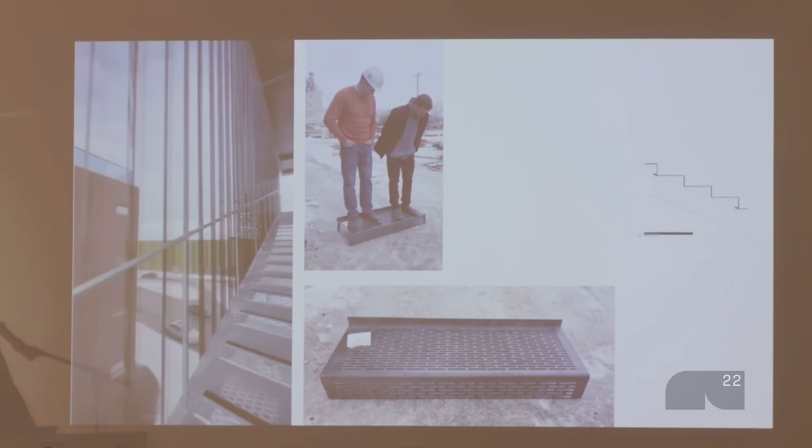So let's see if I have anything more on that—a couple of small details. This is Ken again, testing the type of stair that's custom built from these parts that get bolted on site. They're looking at the perforated material before it goes up, so it's really transparent, but then massing-wise it again creates a variety on the facades. You can see it overlooking the river.

And then the back building is just under construction. Now I have one more project, but a little interlude.

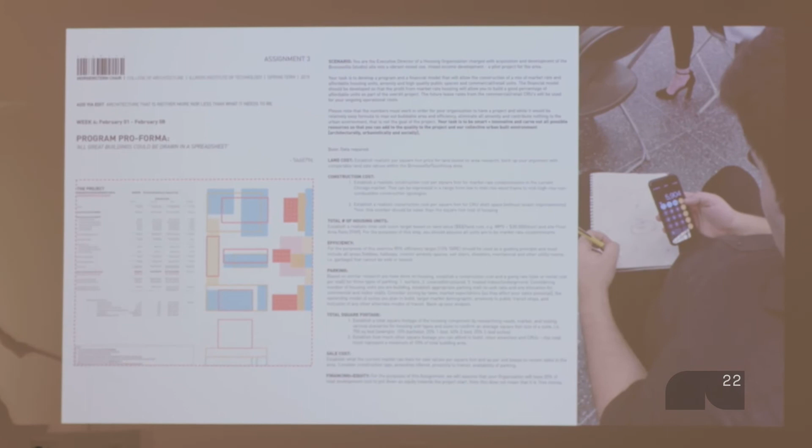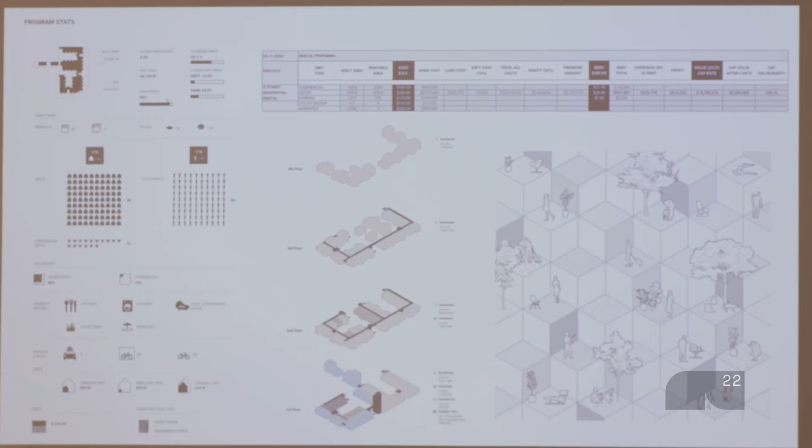Of course, we teach as well. We've been trying to teach about—we were at IIT, then just this past term I was at Cornell—trying to teach students about the money, because we know it's an enabler. We don't want you to get cynical as soon as you get out in the workforce, so you learn how details work. So we built one-to-one details and things like that, but basically doing housing, because we think that is where the future is, and having the students do things like they had to have their own proforma. They had to constantly check their design against that proforma to make sure that whatever design calls they were making, that they were reasonable and so on.

And then I'm gonna skip something here, and then I'll do one more thing. So yes, sorry, one more interlude and then the one more project. So Platform Middle is a book that we're writing currently. It was a symposium on housing that we organized at IIT in 2019, trying to gather all of this information and put it in one place. What are the design tricks? Where can the architect actually make a difference? So it should be coming out at the end of the year.

The recognition that in North America, when you look at those European magazines, you students out there, you're not going to be able to do that, because in North America everything's driven by money. Second part, we have two exits, so that requires that you have a double-loaded corridor almost everywhere. Not required in Latin America or Europe, I think most of Asia, until you go really high. And then we don't have any public policies that govern quality. So we have a big uphill battle.

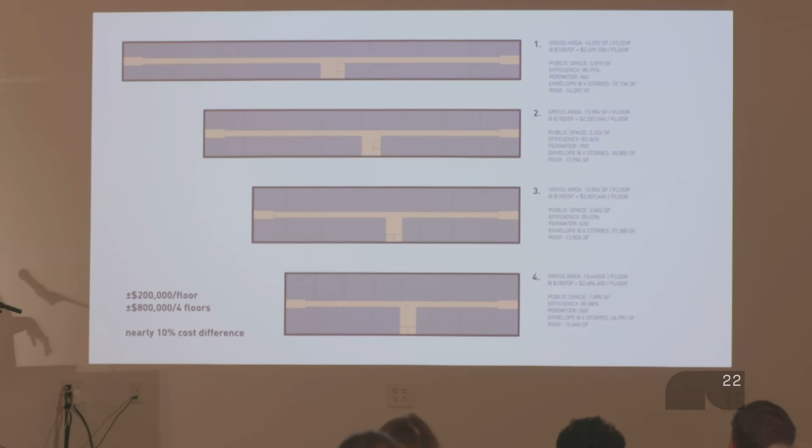Anyway, and this is what happens. So you could stretch your building, you have more window, you get great access to light at the back of it, which results in this. Like in Australia, there's a code that requires that you actually have a certain amount of sunlight hit the floor in an apartment building setting. We don't, and so we end up with this at the bottom. And so the architect constantly works towards trying to solve that formula, solve that problem. And you can't get away with taking the constraints out of any of these—you have to answer to all of them.

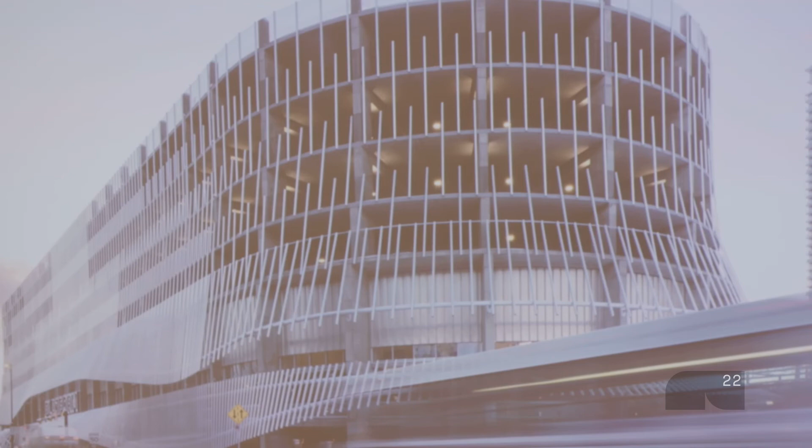And then the last thing is this. We just finished Parkade of the Future. Now why am I talking about parkades? This is Calgary—this is like the Texas of Canada, where cowboys thrive and oil is big and that sort of thing. But the Calgary Parking Authority was looking to do their last parkade ever, because they too recognized that I think it was 2015 or '14 was the year car ownership peaked, and ever since we now have fewer cars constantly—the younger generation is driving less for the first time. Anyway, it's 510 stalls we were asked to build, but we had to think about how this could be converted right away, because we have the need for the cars right now, but we don't have it in the future. The site was super challenging.

We had an LRT line, which is their light rail system, going underground—you couldn't put any foundations for a third of the site. It ended up being a big spiral donut for a bunch of reasons. But what's important about thinking about buildings this way now is what parts of them can be reused in the future. In our case, we made the whole thing—because the site was long enough—a 1% slope, so you have no ramps that you have to remove in the future if you want to turn this into office or housing, except the single one that goes past an innovation center that's also housed there.

There's already a bunch of activities there. There's an innovation center for 55,000 square feet. There's a cafe on the ground floor. This is the only thing that has to be removed when it gets converted into other uses. Even the pickets on the face of it become the residential balconies in the future. All the things are hidden.

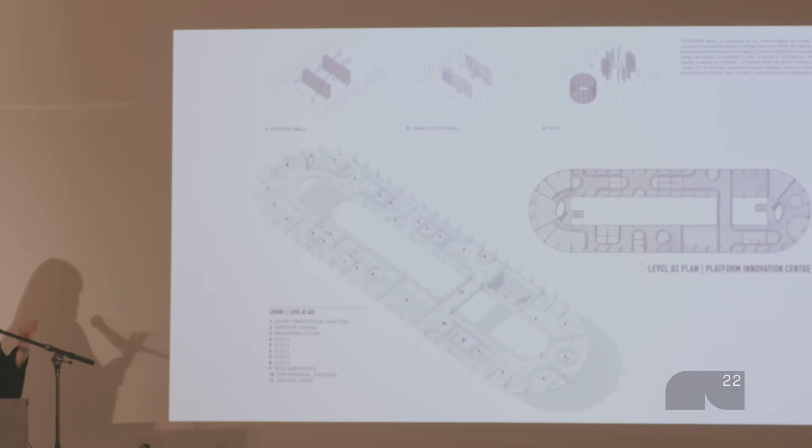This is about—I'll just show you a couple of pictures. The innovation center, we used scaffolding to do all of the bits in it. And the cool thing is that cars kind of drive through it, through the donut, as they get into the parking stalls. And we try to clean it all up so there's no mechanical bits hanging in there.

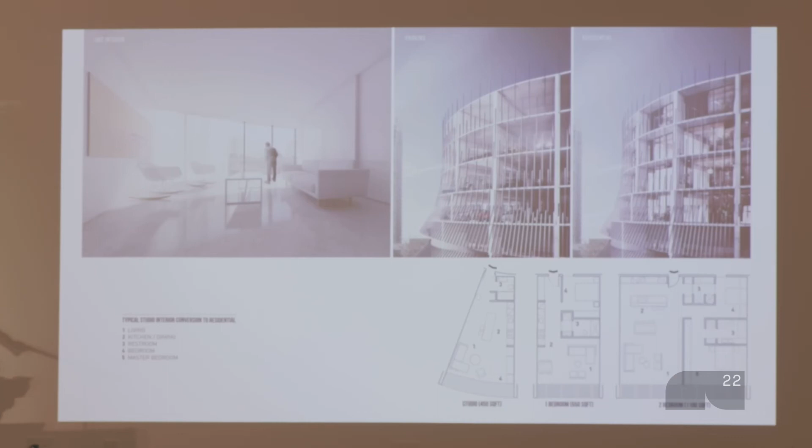We used some of the lessons we learned from the 62M project, and these are the conversion strategies for the future. So how do we think about buildings in a way that they can withstand that? Taller floors in this case, a little bit more structural capacity. The investment was about 20% extra in the beginning for this to be fully convertible with no waste in the future. So fortunately, the municipal government could see it. What's happened since is there's this big Instagram thing where car guys go in there and take pictures. It's pretty cool, I'm excited about it.